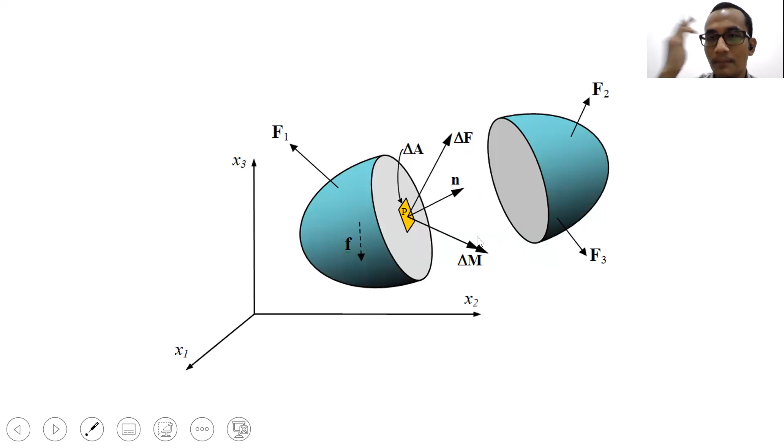So in bahasa we call it gaya dalam, those internal force, or moment dalam, those internal moment. So when we talk about internal effect, we have two types, which is the first one is internal force and the second is internal moment.

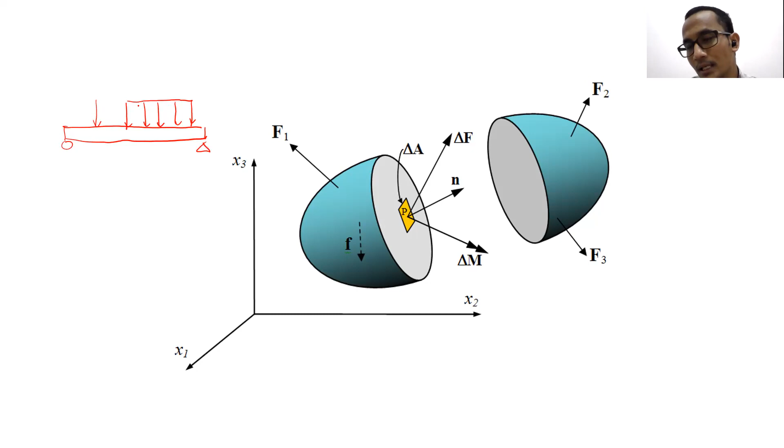So for example, if we have a structure like this, a simply supported structure like this, up until yesterday what we discussed was just what is happening to the structure if we have an external force like this, or yesterday we learned about the distributed force as well. So we learned that if we have an external force and distributed external force, what is the response of the structure? The response here that we are talking about was just the external load response.

And plus one more thing, which is the gravitational force. The response that we are talking about is the response which is happening at the supports. So if we draw a free body diagram, this is what we will have. And here there is an external reaction, this one as well, something like this. Okay, this is what we learned up until today.

So when we have an external force, or external distributed force, or gravitational force, what will be happening and what is the response at the supports, something like that. So the things that we learned up until today was just this one, external effect only.

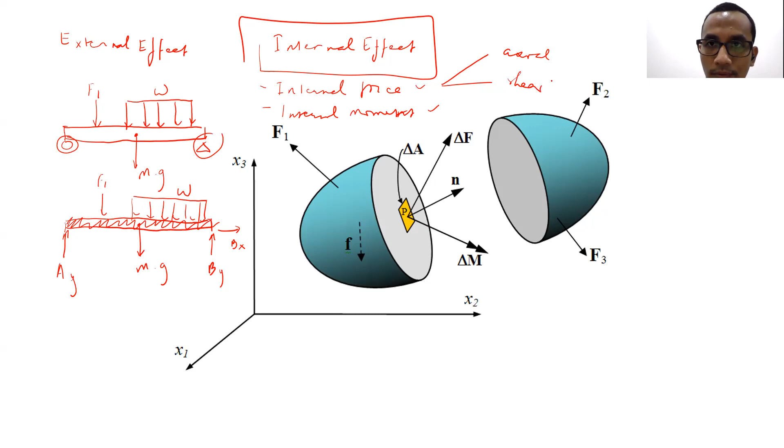And normally the internal force, we can divide it into two as well. This is the axial force, internal axial force, and the second one will be the shear force. So that's the thing that we will study starting from today.

Up until this point, any of you want to ask a question? No one here want to ask a question? Not yet.

I'm sorry, sir, that's the internal force, shear, and what's that about? I cannot read it. We will have a shear force and axial force. Axial. Yeah, axial. Oh, okay. I'm so sorry that my writing is so bad, so it's hard for you to read. Sir, mine is worse.

Okay, so that's the thing that we will study starting from today. And what is actually internal effect? What is actually the internal force and the internal moment? So basically, when we learn about structure up until today, what we studied was just finding the response which is happening at the support, or the response happening at the other member, or the response happening at the particular member due to the other member. That's the thing we studied up until today. But when we talk about internal effect, we will talk about what is really happening.

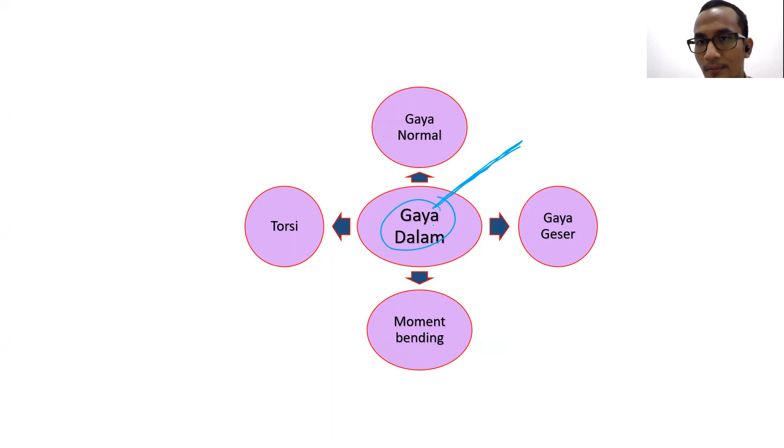So the internal effect, we can divide into several types, based on the direction and whether it is a force or moment.

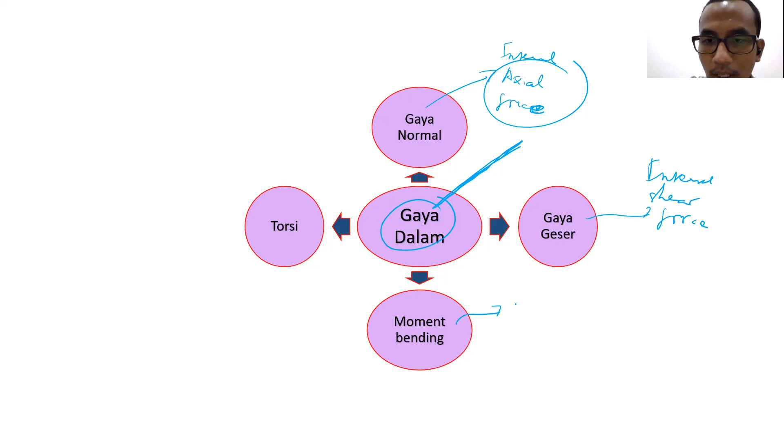So the first one is we normally call this axial force. In the things that you will study up until next, we normally call this axial force. Then this one is shear force. Then internal axial force, internal shear force, then internal bending moment, and the last one is internal torsion. So those four are things that may come up when we talk about internal effect.

So when we talk about internal axial force, this is what we normally discuss. When the direction of the load is like that, it's in the direction of the member, like that.

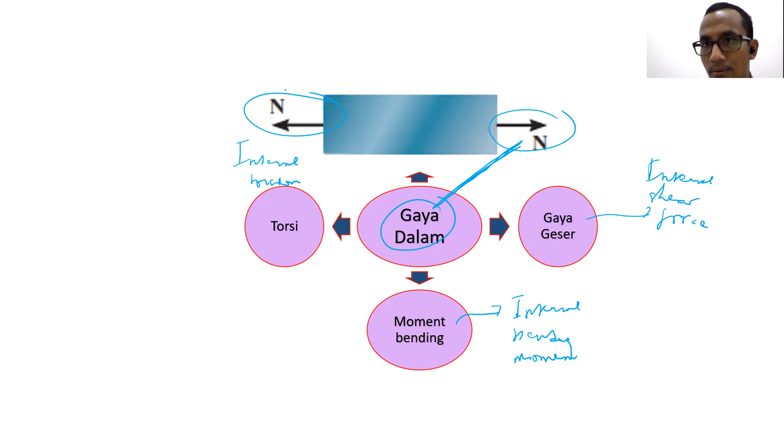When we talk about the shear force, it's perpendicular to the direction of the member. So instead of going, if the member is like this, instead of going outside or inside, it's going perpendicular to it. This is what we call shear force. This one is going in the same direction as the member, we call it axial force.

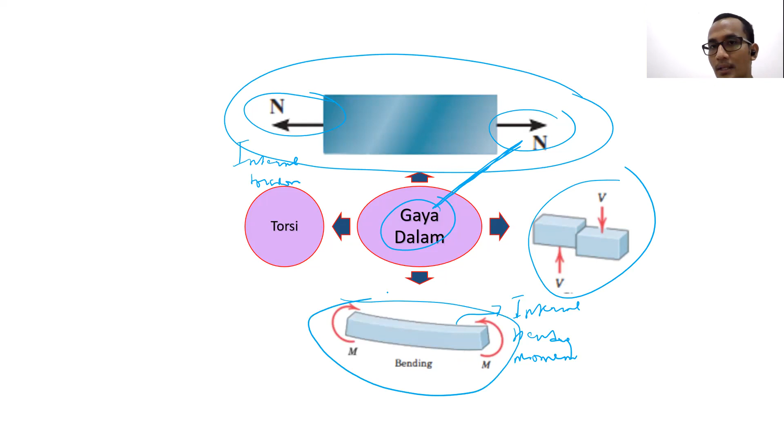Then bending moment is something like this, internal bending moment, right, the one that we talked about. And the last one is torsion, like this. The difference between torsion and bending moment: the moment bending will create a moment like this, but torsion will twist the thing that is applied on it, something like that.

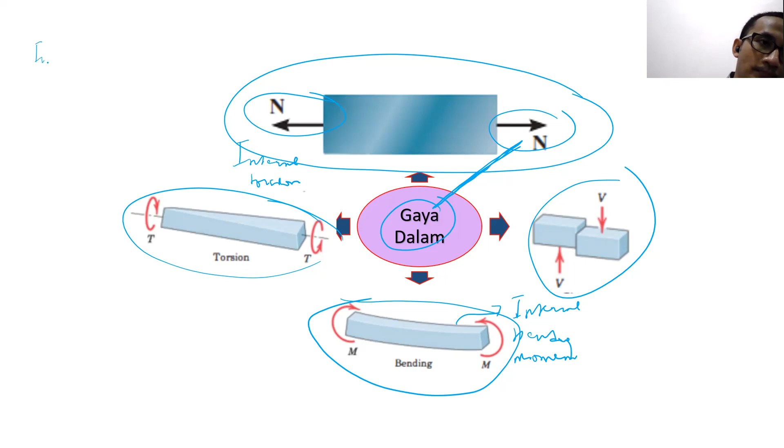So those four we will talk about quite a lot in the internal effect, especially these two, although it's not necessarily that we will omit these two as well. So basically, when we talk about internal effect, there will be four: internal shear force, internal bending moment, internal axial force, and internal torsion.

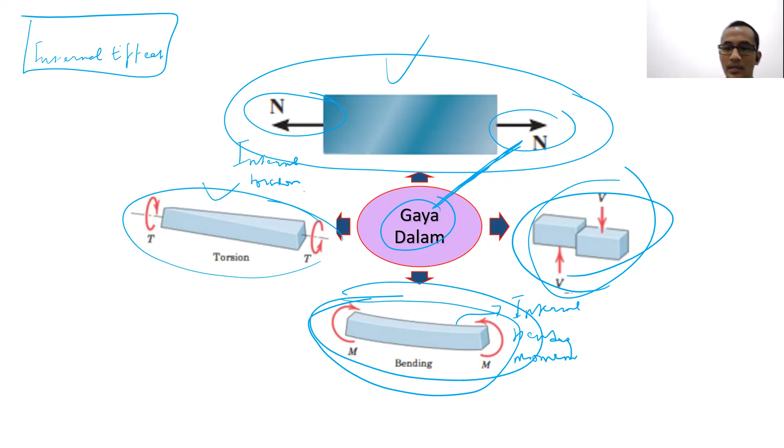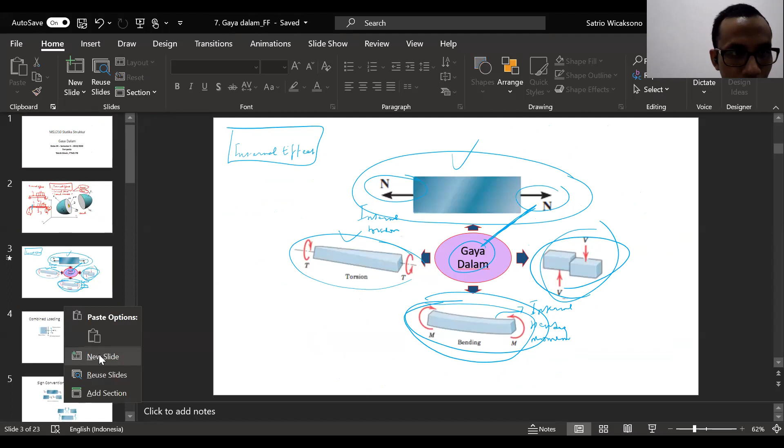Okay, so I think before we go here, I will add another thing. Maybe some of you are still quite confused about what is the meaning behind internal force or internal moment.

So I will give you one simple example on this particular problem. Please imagine you have a structure like this, simply supported. Here we have a roller, and here we have a pin. The structure is under a very simple load happening exactly in the middle.

For example, here we have 10 kilonewton, and the length here is 10 meters.

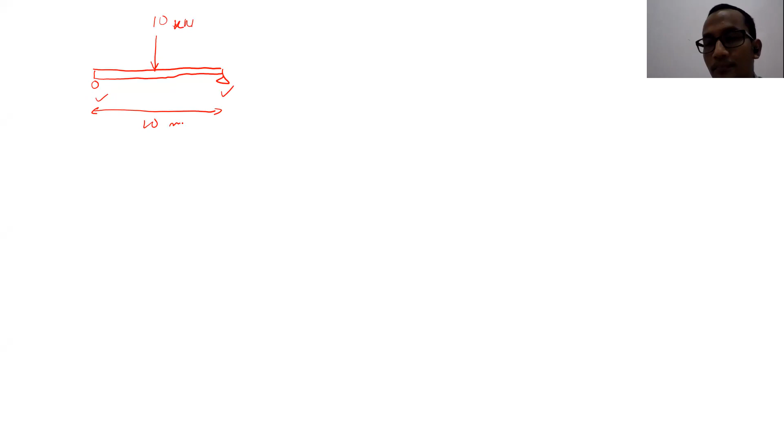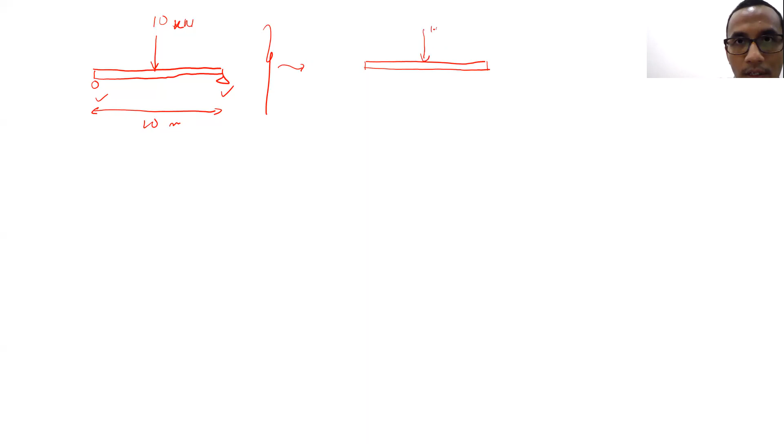If I ask you to find out the external effect, this is the thing we normally study up until now. So we first draw the free body diagram. Exactly in the middle here, we have 10 kilonewton. And here we have AY, here we have BY and BX. This is what we call finding the external effect.

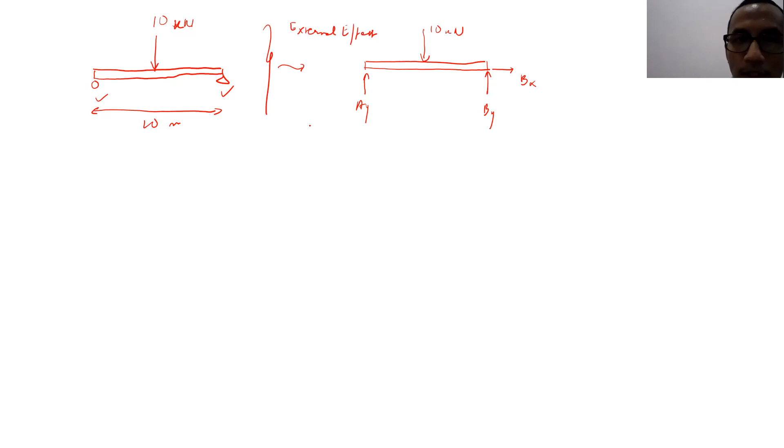Okay, then using sigma Fx equal to 0, we will find out that Bx is equal to 0. Using sigma moment at A equal to 0, then we found out that By multiplied by 10 minus 10 kilonewton multiplied by 5 equal to 0. That's why we will find out that By is equal to 5 kilonewton.

Using sigma Fy equal to 0, then we will find out that Ay plus By is equal to 10 kilonewton. Because By is 5 kilonewton, then Ay is equal to 5 kilonewton. So this is the external force. Sorry, this is the external effect that we normally try to find out. External effect.

Internal effect is completely different. But most of the time, in order to find the internal effect, we have to find out all the external effects first. Okay, so we have to find out all the external effects first. Then after that, we can go for the internal effects. So the internal effect, this is one of the examples.

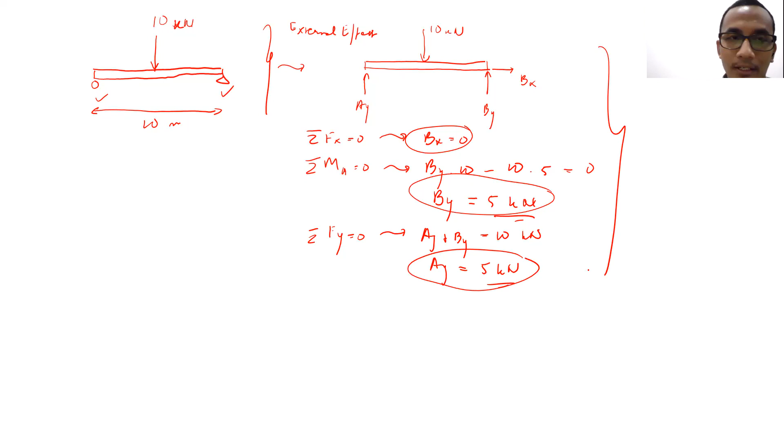I want to find out what is really happening at 2.5 meters from the left edge. I want to find out what is really happening inside of the structure, okay, at 2.5 meters from the left edge, like this. So at this particular point, internal effect at this particular point. I want to find out what is really happening there.

Okay, so basically what we're supposed to do is to find out at that particular cut what is really happening there. Okay, what is the internal force which is really happening there, and what is the internal moment which is really happening there. How can we do that?

The easiest way is to cut exactly at the point where we want to find the internal effects, like this. So this is the easiest way, to cut it here. We make a cut there. Okay, we make a cut. So after we make a cut there, what are we supposed to do? So basically, after we make the cut, we can divide the structure based on whether it is part of the left side of the cut or the right side of the cut.

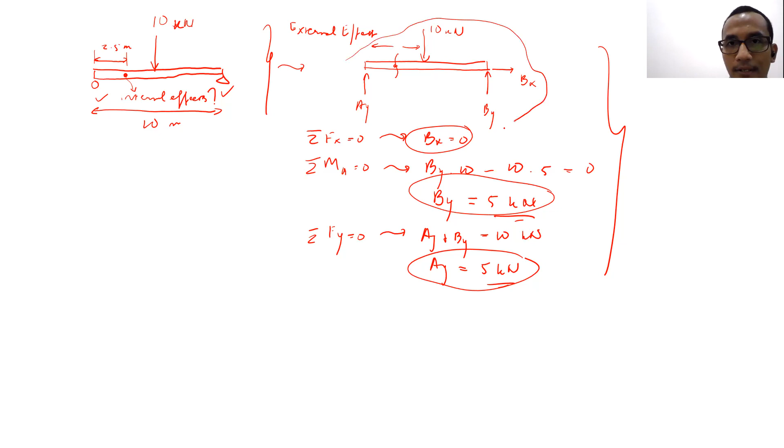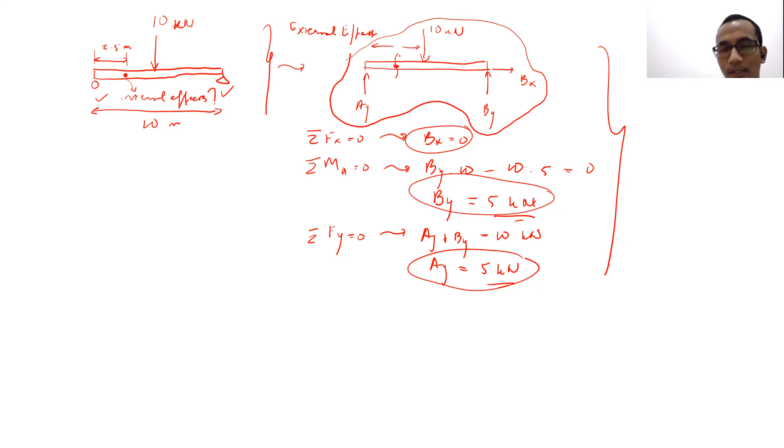Okay, you can imagine if we have things like this, then we cut exactly at this particular point. Okay, we cut exactly there. We cut the structure there using this particular line. Okay, in order to make it easier, I will use a different color. The blue line there represents the cutting that we do. After we do the cut, then we can analyze the left side of the cut and the right side of the cut. Okay, if we take a look at the left side of the cut,

I will ask one of you guys. Marsha. Hello, Marsha. Yes, sir. Okay, Marsha.

Now, I want to take a look at the left side of the cut, Marsha. Okay. If I want to see the left side of the cut, then if I draw the free body diagram of the left side of the cut, it's most likely like this, right? So this one actually represents the part where the cutting happened. Yes, sir. Okay. So now, what is the external effect which we're supposed to include there, the left side of the cut, based on this particular free body diagram? What do you think?

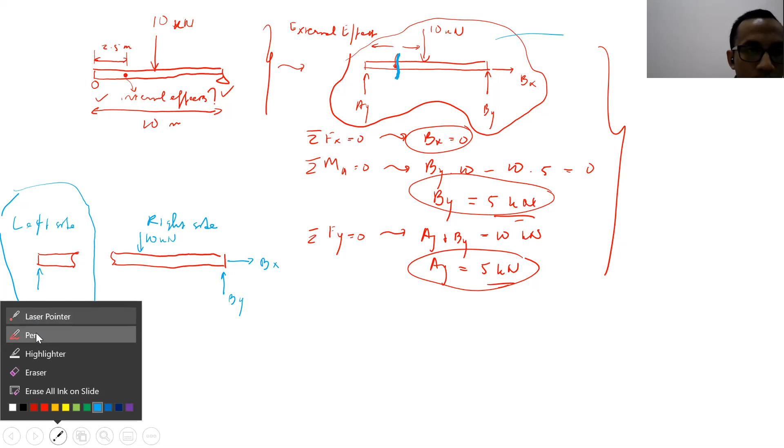Okay, but when we cut it like this, if we want to take a look at the equilibrium of the left side of the cut, the equilibrium, I'm telling all of you guys, is supposed to still be there. The left cut is supposed to still follow the equilibrium. The same thing happens for the right side of the cut. It's supposed to still follow the equilibrium.

Okay, it's supposed to still follow the equilibrium. That's why, okay, I will remove this first because I will do it later. That's why, like it or not, there will be internal effect at the cutting area, around the cutting area. There will be internal effect there.

There will be internal effect, there will be internal force and internal moment, which is happening there in order to ensure that both the left side of the cut and the right side of the cut are still in equilibrium. Do you get it, Marsha? Yes, sir. Okay. Now, Marsha, still for you.

If I want to make sure that equilibrium is still happening on the left side of the cut, what internal force am I supposed to add at the cut area here? What do you think, Marsha? In order for the equilibrium to happen at the left side of the cut.

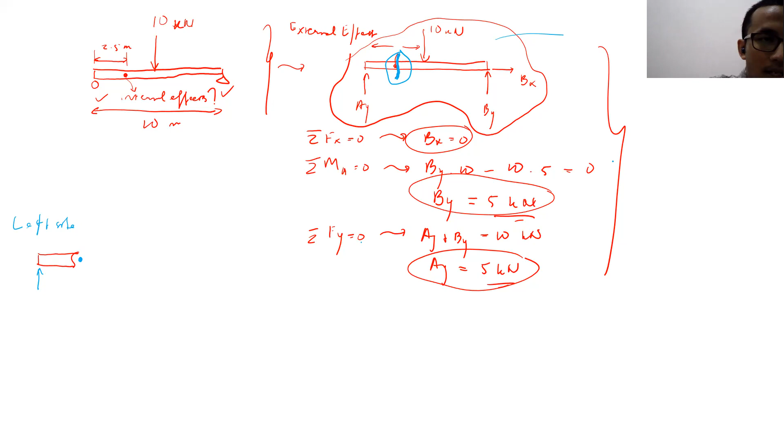No, I mean, in order for the equilibrium still to happen there, the left side of the cut is supposed to follow these equations, right? Sigma Fx equal to 0, sigma Fy equal to 0, and sigma moment equal to 0, right? Yes, sir. That's what we talk about with equilibrium, left side of the cut. So we have to ensure that these equations are still true for this particular free body diagram.

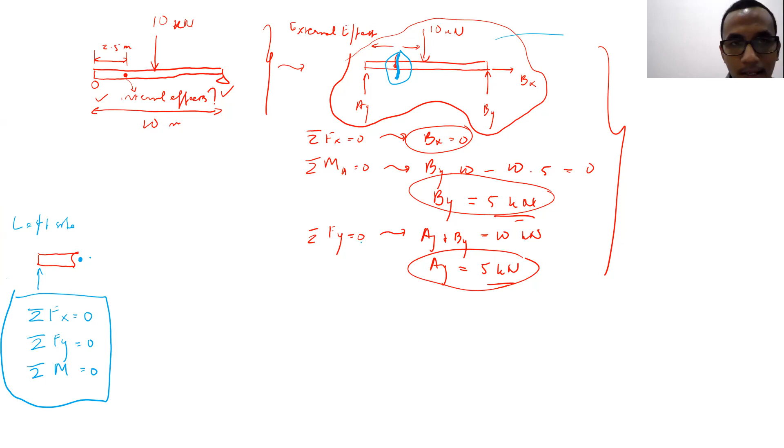In order to do so, we have to ensure that we put the correct internal effect there. Do you get what I mean, Marsha? Yes, sir. So the internal effect is supposed to be there in order to ensure that the equilibrium holds true, Marsha. So what do you think? What internal effect is supposed to be there at the cut part?

Hello, Marsha. Sir, just to make sure, so the internal effect in the cut section is basically the one to replace the forces being cut off to maintain the equilibrium? Yes, correct. So it's basically kind of like a replacement. Not necessarily replacement, but what you said is half correct.

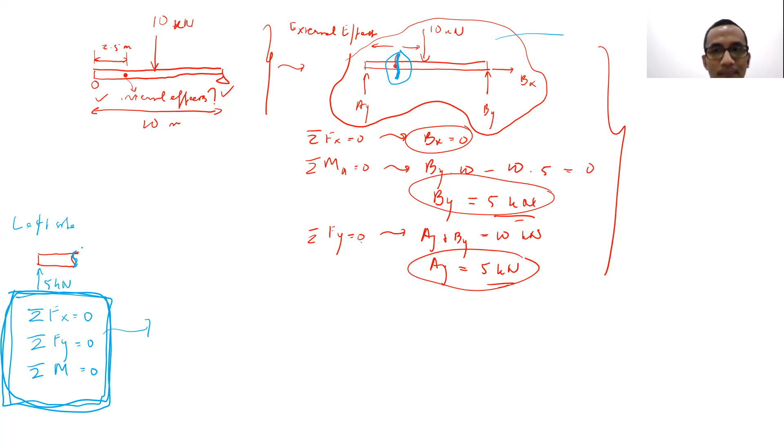So when we talk about the left side of the cut, the 10 kilonewton will not be there. By and Bx will not be there because they are not part of the cut side, right? But like it or not, these three equilibrium equations still have to hold true because the equilibrium is still there. That's why, at the cut area, there must be an internal effect to make sure these three equations still hold.

Now the question is, what kind of internal effect is supposed to be there to ensure the equilibrium still holds true? Oh, I see. You get it, right? So for example, the easiest one, sigma Fy equal to 0. It is still maintained in this free body diagram. So, like it or not, we have to add a vertical internal force at the cut area here, right? Correct or not?

Correct. And is the direction supposed to be going down or going up? Going down. It's supposed to be going down. And the value is supposed to be what, in order to make sure that sigma Fy is equal to 0? Equivalent to this one, right? 5 kilonewtons. Yeah, so it's supposed to be 5 kilonewton. By adding this, I ensure that sigma Fy equal to 0 still holds true, right?

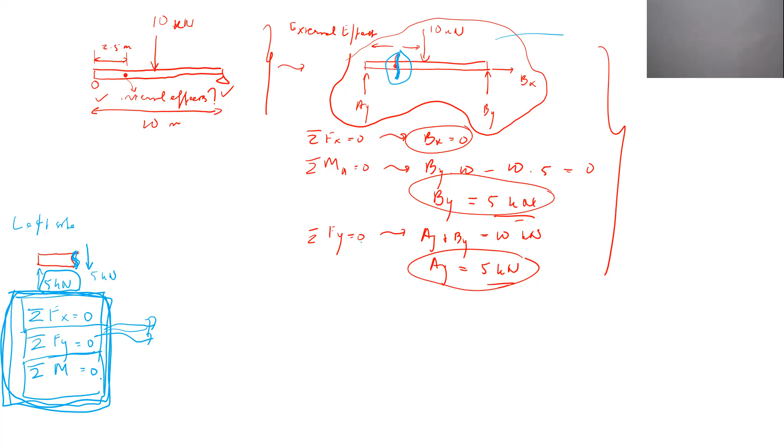What do you think, Azad? But sir, do we have to refer to a point for the sigma moment? Yeah, it's up to you. You can refer to any point that you want there in the free body diagram.

But it already holds, sir, because the forces are already symmetric. Yeah, the forces are not symmetric. Okay, it's anti-symmetric because the left side is going up 5 kilonewton, the right side is going down 5 kilonewton. And if I try to check the sigma moment, for example, on the left side, there will be 5 kilonewton multiplied by 2.5, right? So there will be moment there. The sigma moment equals to 0 is not automatically fulfilled.

Okay, so like it or not, in order to ensure that sigma moment equal to 0 still holds true or is fulfilled, the current moment, which is happening due to the 5 kilonewton going up and down, is actually clockwise. So we have to add counterclockwise moment. And the value is supposed to be 5 kilonewton multiplied by 2.5 meters. So in this case, it's supposed to be 12.5 kilonewton meter. If I add moment like that at this particular cut, then all of the equilibrium equations are fulfilled.

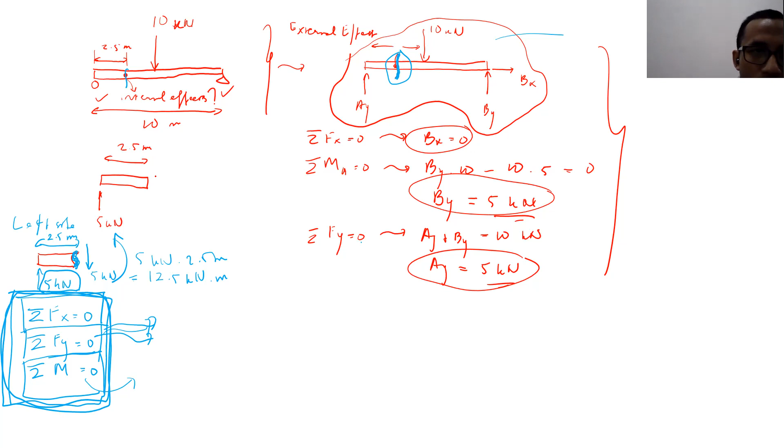That's why now I can say that for this particular cut, if we take a look from the left side of the cut, we have two internal effects there. The first internal effect is shear force going down 5 kilonewton. The second internal effect is moment, counterclockwise moment, 12.5 kilonewton meter. Those two are the internal effects which are happening at the cut.

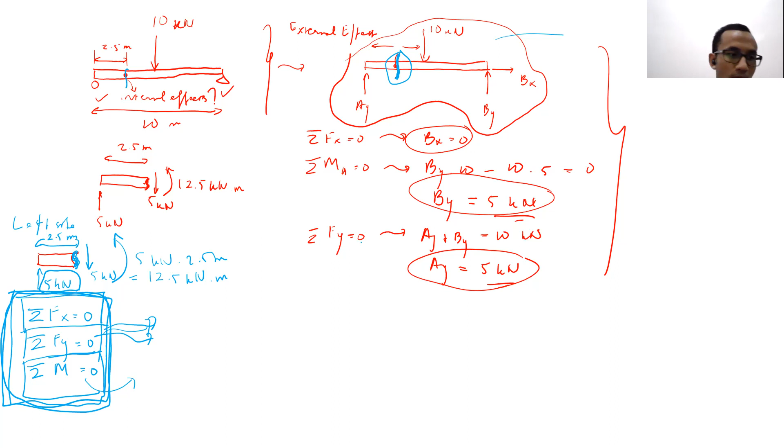Do you guys have any question about this? Any question? Yes, Lalu. Sir, I don't understand why the moment is counterclockwise. The moment is counterclockwise because the 5 kilonewton force going up and 5 kilonewton going down are actually causing a clockwise couple, right? Yes, sir. The value of the clockwise couple is actually 5 multiplied by 2.5, which is 12.5 kilonewton meters clockwise.

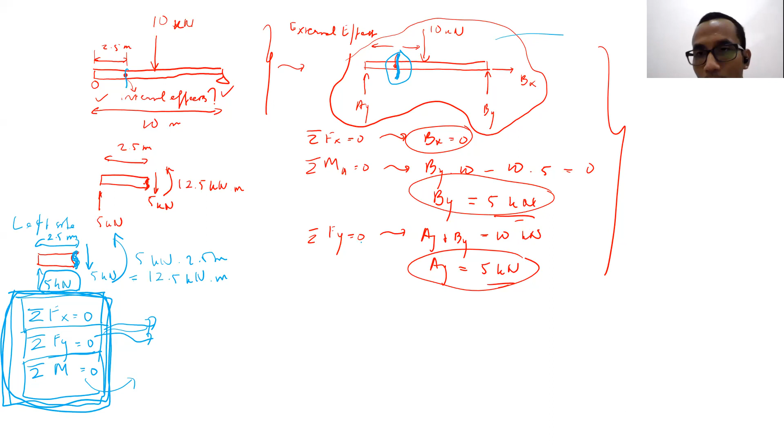Okay. In order to ensure that the structure is under equilibrium on the left side of the cut, I have to give internal moment in the opposite direction. Oh, okay, sir. So just for the equilibrium. Yep, correct. Because the equilibrium is supposed to be fulfilled there. That's why the internal moment there is supposed to be counterclockwise. Okay, sir.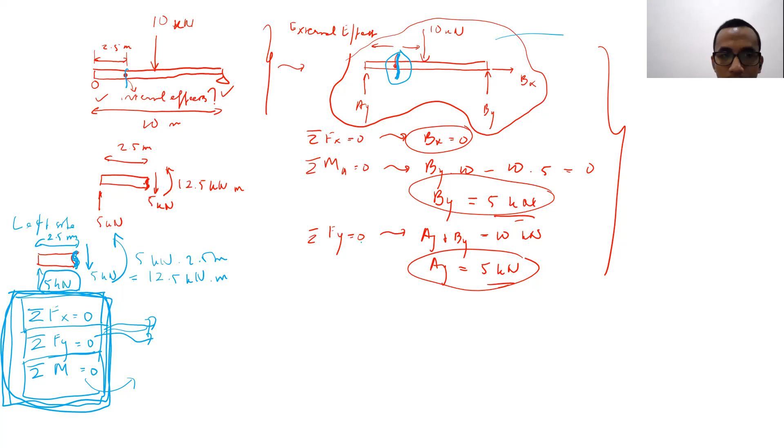Sir, just want to clarify, sir. So to get the internal effect is to draw the force the opposite way, sir? Actually, it's not to draw the force the opposite way, but just to calculate using this equilibrium equation, Marsha. So as long as we ensure that these three equilibrium equations are still fulfilled, then the internal force that we calculated from these three equations is supposed to be correct.

So basically, just now, I found out that the shear force is 5 kilonewton by using sigma Fy equal to 0, right? I found out that there is no axial internal force using sigma Fx equal to 0. Then the last one, I found out that the internal moment is 12.5 kilonewton meters counterclockwise using this particular equation, sigma moment equal to 0.

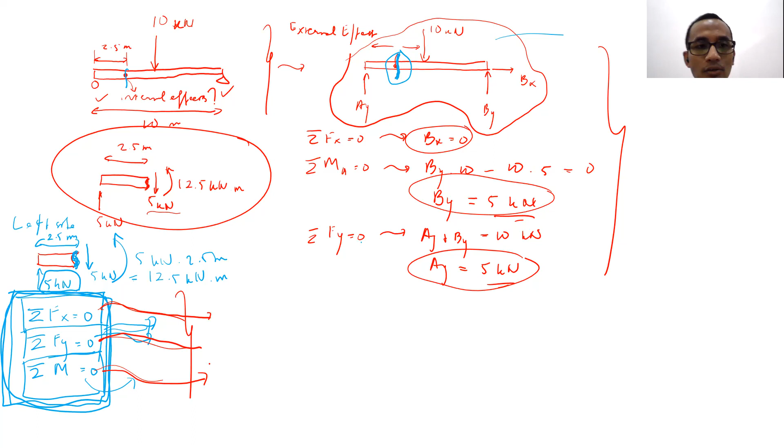So basically, after you do the cutting, to find out the internal effect at that particular cut, the first thing that you're supposed to do is to implement the equilibrium equations to find out the internal effect which is happening at that cut, like that. Do you get it, Marsha? Okay.

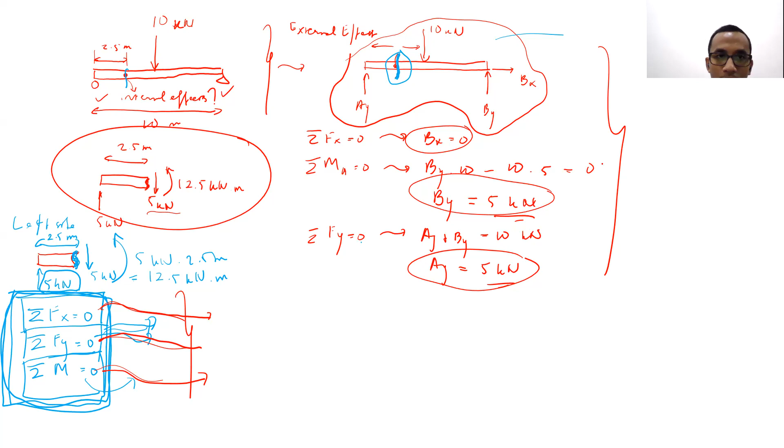Now I will tell you one important thing about this cut. Just now, we took a look from the left side of the cut. Now, let's do the same thing, but using the right side of the cut. If I draw the right side of the cut, this is the free body diagram of the right side of the cut. Like just now, we have 10 kilonewton here. Then here we have By equal to 5 kilonewton. Bx is equal to 0, so I will not draw it there. Okay.

So this is our free body diagram, but this free body diagram is not yet complete because we have not yet completed it with the internal effect. Okay, now this is what I normally do. I will assume it first. I will assume that I have an internal effect of shear force V there, an internal effect in the shape of axial force N there, and an internal effect in the shape of moment like this, M. I assume that we have those three: M, N, and V.

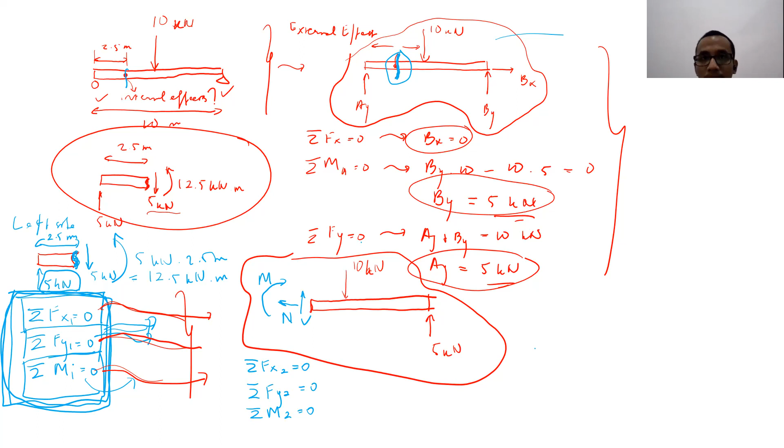I think I'll point out another student here. Raihana. Hello, Raihana. Hello, sir. Can you help me to find out those three internal effects, Raihana?

First, try to find out N, the axial force, using sigma Fx2 equal to 0. For this particular free body diagram, if I want to use sigma Fx2 equal to 0, what do we have there? What are the forces going horizontally there? Only N. N, correct. So here, N only, then N must be equal to 0, right? Yes. So we have the value of the axial force. N is equal to 0 because using sigma Fx2 equal to 0, N is equal to 0.

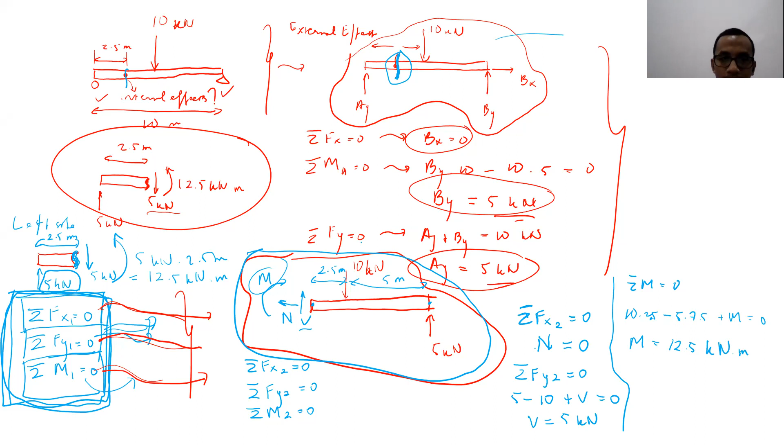Done? Nope. There is a moment there, the M. Is M supposed to be plus or minus? Plus. Plus M equal to 0. So M is equal to? Wait. 12.5 positive. So this one is 25, and 5 multiplied by 7.5. Oh, positive, yeah, correct. 12.5 positive. So it's supposed to be 12.5 kilonewton meter. Okay. So that's all the internal effects, right? Or anything else, Raihana? I don't think so. So this is all that we have there.

So if I redraw it again, the final free body diagram is supposed to be like this. 10 kilonewton, 5 kilonewton, and because of the internal effect, we will have shear force 5 kilonewton going up here, and we have as well moment 12.5 kilonewton meter there. Okay, correct, right, Raihana?

Sir, wait. Is the moment on the right side supposed to be the same moment as on the left side? Like, the direction is different? Like we are picking the positive when we go clockwise. Yeah, that's the thing that I want to discuss right now. So don't worry about it. Okay, so all of you, please take a look at this: the second free body diagram, the right side of the cut, and this one as well.

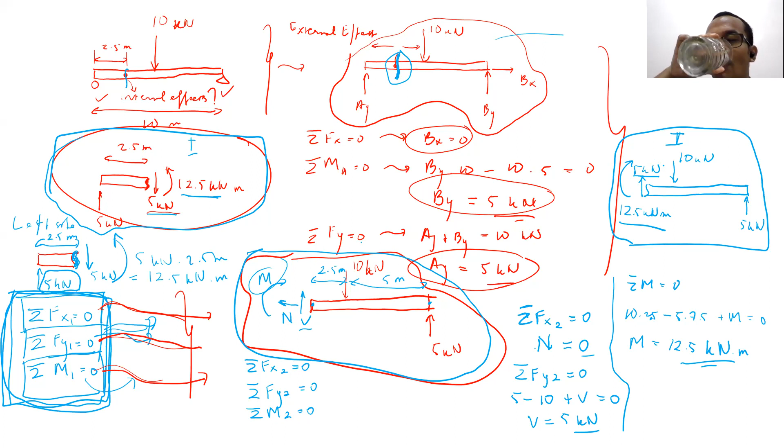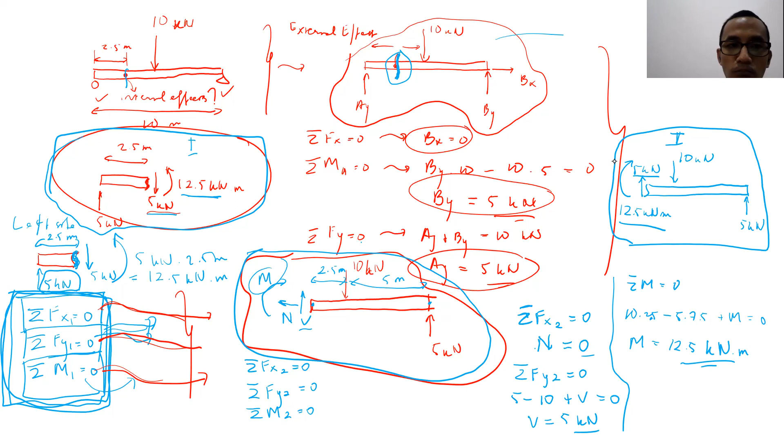Okay. Is there something weird there? Is there something unusual there? So sir, they must be equal and opposite reactions. Who said that just now? Irfan, sir. Okay, Irfan. Thank you, Irfan. How about you, Asep? Same thing, right? Yes. The positive direction of the moment. What do you mean by the positive direction of the moment? On the left side, it's counterclockwise, but on the right side, it's clockwise.

Yeah. Positive, negative, yes, we're supposed to follow the rules, but for internal effects, the rules are slightly different. We have to follow the other sign convention that I will discuss after this. But the first thing that you notice here is, based on the right side of the cut, we have 12.5 kilonewton meters clockwise. Based on the left side of the cut, we have 12.5 kilonewton meters counterclockwise, right? 5 kilonewton going up on the right side of the cut, 5 kilonewton going down on the left side of the cut. Okay.

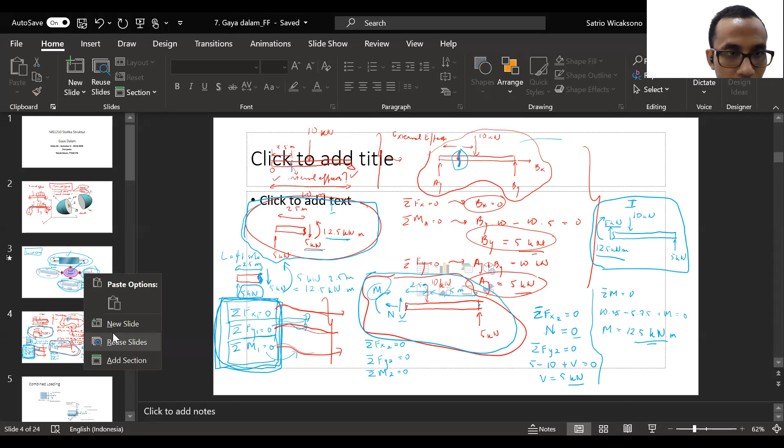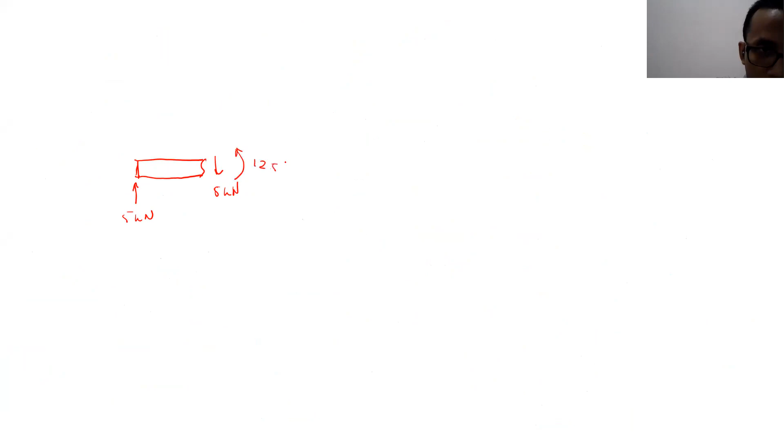There is one reason why the internal effects are in the opposite direction on the left side of the cut and the right side of the cut. So basically, I will need another slide here. Okay, basically, if I have to redraw again, right? 5, 5, 12.5 counterclockwise. So this is the left side of the cut. And this is the right side of the cut. Okay. So basically it's like this. Why are this and this in the opposite direction? There is one reason behind that.

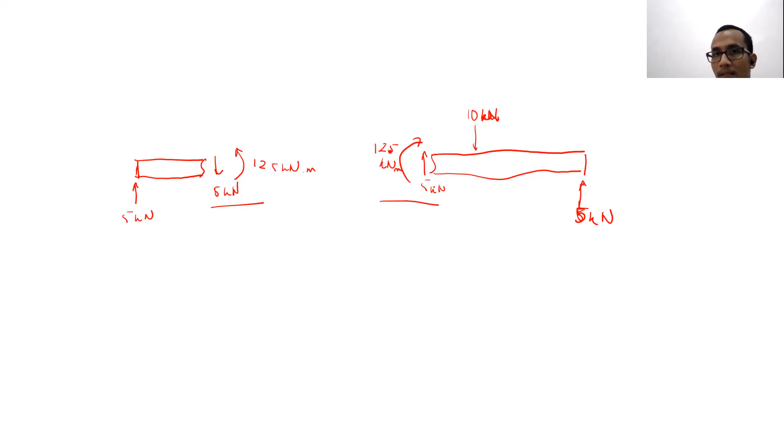When you join this together with this one, join it together again at the cut area, the results that you're supposed to get will be exactly the same, okay, as the previous one without the cut.

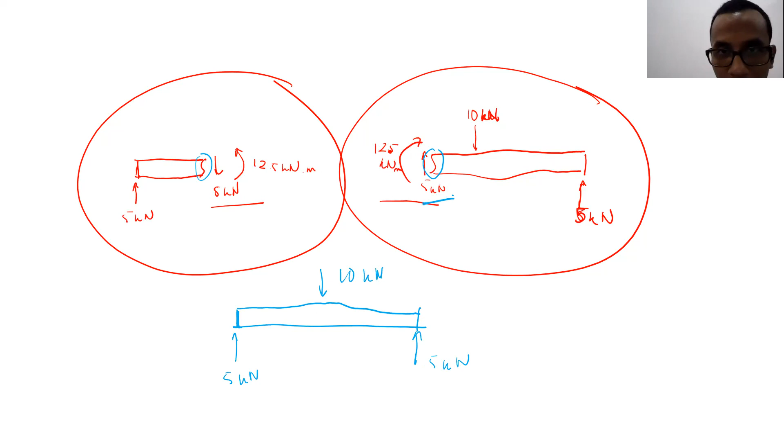Okay, if you join it together, 5 kilonewton here will cancel out with this one, 5 kilonewton. 12.5 kilonewton meters here will cancel out with this one, 12.5 kilonewton meters. So if you join it together, because these cancel out, what you will get will be like this: 5 kilonewton going up, 10 kilonewton going down, 5 kilonewton going up.

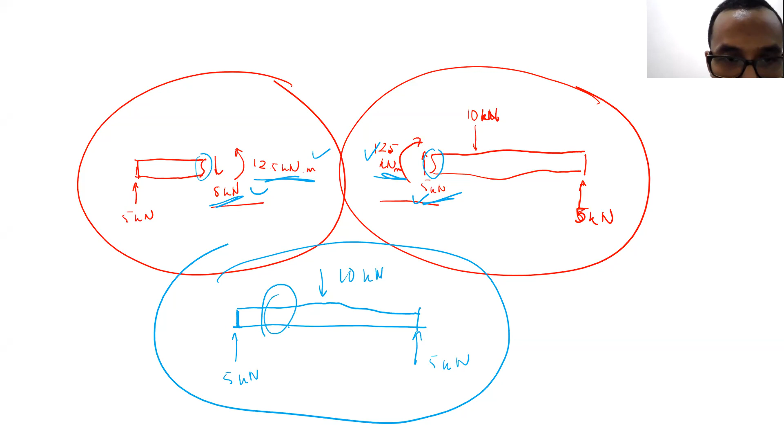So basically, that is why the results must be in the opposite direction, because when you join it together at the cut area, it's supposed to cancel out. So there is no more force or moment happening at the cut area, because we join it together and the moment and the force are supposed to cancel out. Whichever side you calculate, the results will be the same, but in the opposite direction.

Do you guys understand this? Anyone here want to ask a question? So sir, when both sides are being combined into one, does the convention for clockwise or counterclockwise positive become only one? Don't think about the sign convention yet, because later I will talk about the sign convention of the internal force, internal moment, the internal effects.

But the basic thing is, the internal effects will appear when you cut and separate the left side of the cut and the right side of the cut. But when you join the left side and the right side of the cut again into one big free body diagram, as usual, the internal effects will be gone because the internal effect from the left side and the internal effect from the right side will cancel out. That's the thing.

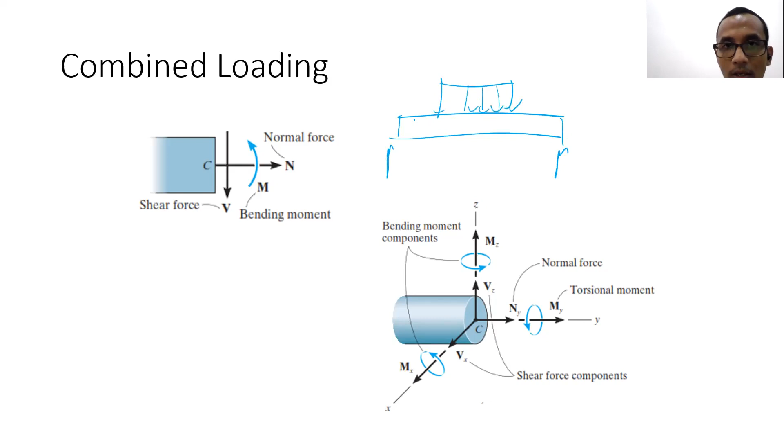So as I told you before, when we talk about the internal effect, normally we have to put all the possible internal effects there. So whenever we cut, for example we have a structure like this under a certain load, like that. Whenever we cut, we're supposed to put all the possible internal effects. So all the possible internal effects, you can see it like this, plus the torsion as well, as what Matthew said.

So we have to put it like this. We have a N, then we have a V, then we have a moment, and we have a torsion like this.

Okay, so this is the combined thing, the worst possible case that may appear there, which means all the things are coming up together: the shear force, axial force, moment, bending moment, and torsion.

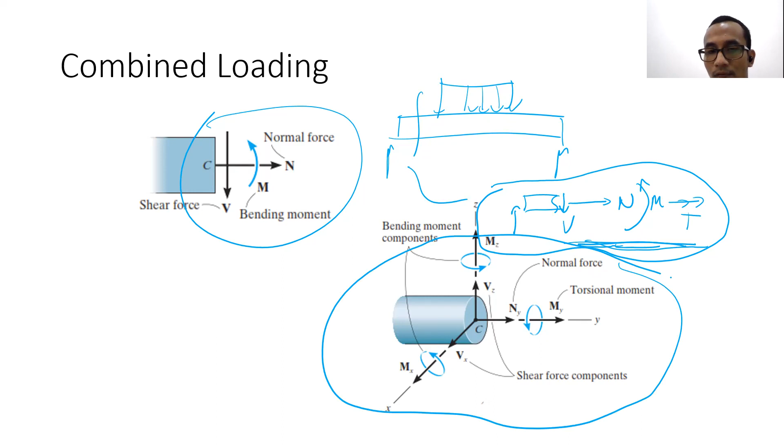Something like that. Okay, in a three-dimensional case, it's even worse. You can see it like this. There are 6 possible combinations there: normal force, torsional moment, bending moment in the Z direction, bending moment in the X direction, shear force in the Z direction, and shear force in the X direction. But we will not talk about the three-dimensional case, so most of the time we will talk about this.

Sorry, this one sometimes it will be there as well. So this is the worst thing that you may come up with. But most of the time, yes, we have it like this. But sometimes we have to handle things like this as well. Okay, then in order to make it easier for you guys, after this I will give several problem examples.

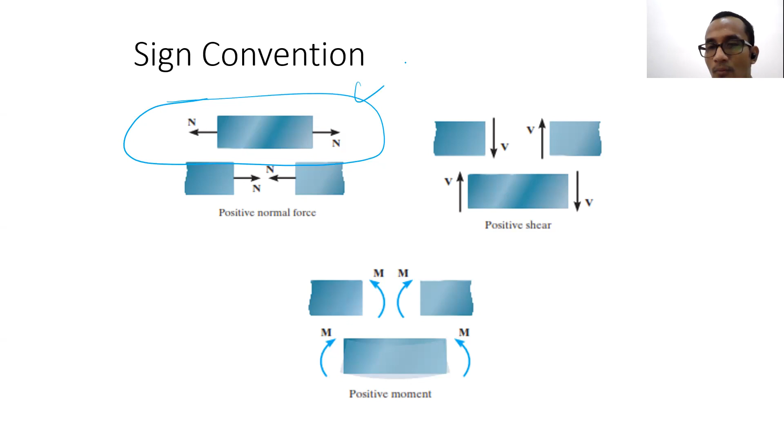But before that, as I told Azar before, we have to discuss a little bit about the sign convention. Whenever we cut, the sign convention on the right side and the left side for the normal force is like this. So tension is positive, compression is negative. So whenever we talk about the normal force or axial force, tension is positive.

Okay, then about moment, for moment which will give a smiley face, a smiley structure, that is the positive moment. So basically, if you see this particular moment, it will give a smiley structure. Why? Because the moment is like this, right, in this direction. That is why it will give a smiley structure.

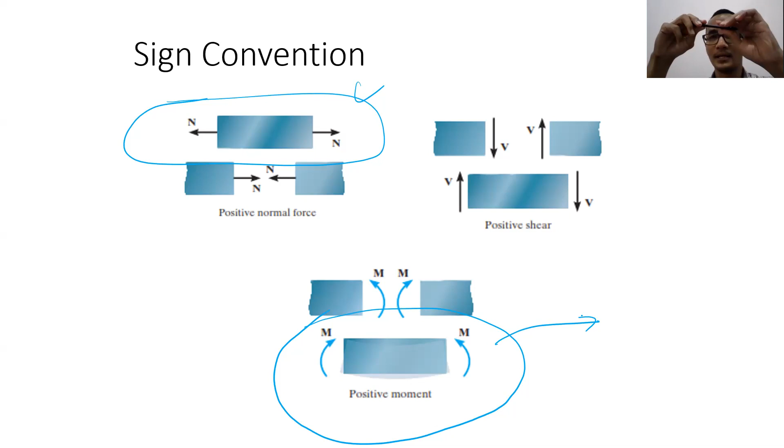So if you imagine that you have a ruler like that - I don't have a ruler in my hand right now - so if I have this structure and I give a moment like this, the structure will deform like this. Sorry, the structure will deform like it will deform like - how to say it - it will deform like this. So it will give a smiley face like that. Okay, it will deform like that. So this is the positive moment direction.

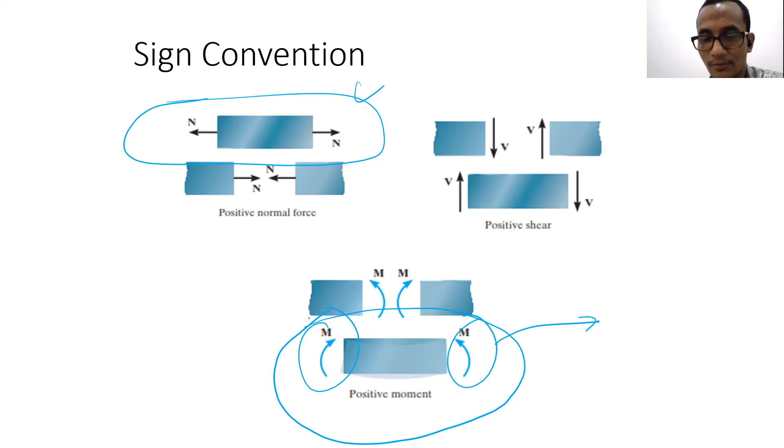On the left side of the cut, it's clockwise. On the right side of the cut, it's counterclockwise. That's the positive moment direction. The positive shear is like this. On the left side of the cut, it's going up, positive. On the right side of the cut, it's going down, positive.

So if I try to conclude, if we have a cut like this, the positive direction of the normal force or axial force is like this, going outside. The positive direction for the shear force is like this, going down. And the positive direction for the moment is like this, counterclockwise. It's for this particular cut.

But for the opposite cut, if the cut is happening here, the positive direction for the normal force is going to the left, going outside. The positive direction for the shear force is going up.

Okay, the positive direction for the moment is like this.

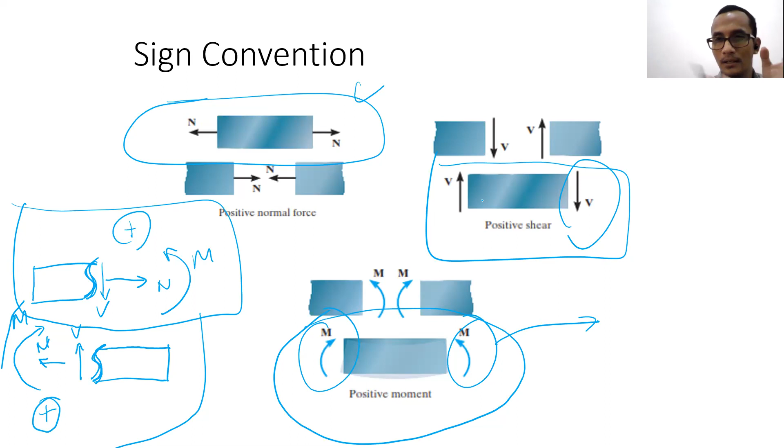Mainly because when we take a look at the left side of the cut, the results there versus the right side of the cut results, will be in the opposite direction. That's why we use this particular sign convention in order to not confuse ourselves. Okay. Yes, sir, I understand. Thank you, sir. No problem.

Okay, I think we will continue with the discussion using one or two problem examples. Then after that, for your homework, I will give you several problems on the external force, sorry, on the distributed force and this particular internal effect at one particular point. Later I will give you guys several homework on this. But first, we have several problems to solve here.

Okay, this is the first problem. This is a combination between distributed external force and the internal effect. The one in question here is the internal effect at point C. So we will have to find the internal effect at point C.

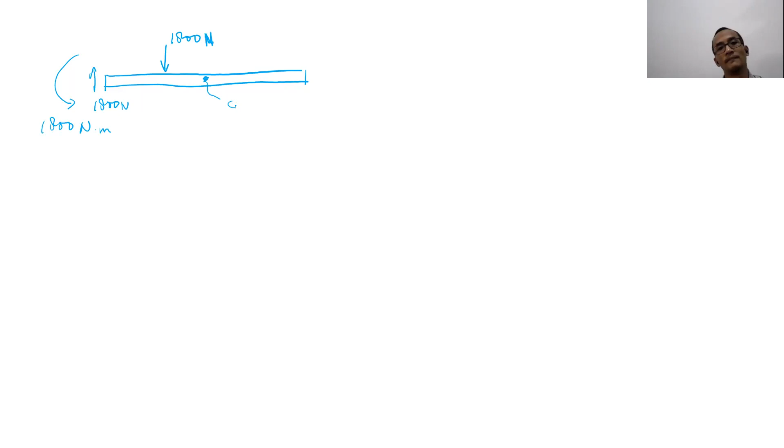Yes, this is C. Okay, so the next thing we're supposed to do is find out the internal force at C, the internal effects at C. Yes, how do we do so?

Do we draw the broken pieces of the left and right side? Okay, so we do the imaginary cut, right? Yes, so we do the imaginary cut, and then we draw the free body diagram, right? Yes.

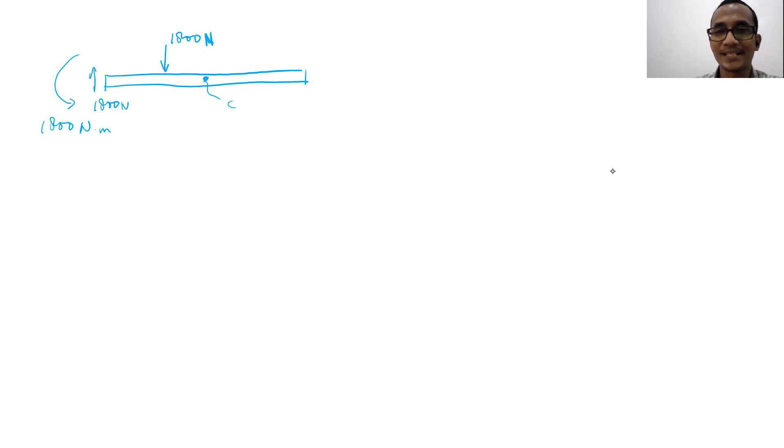So basically, actually this is slightly wrong, this particular free body diagram. Remember yesterday when I told you, Adam, representing the distributed external force as a concentrated force will only work to find out the external effect, right? Now remember, I told you so, right? Yes, yeah, also you don't remember, I think.

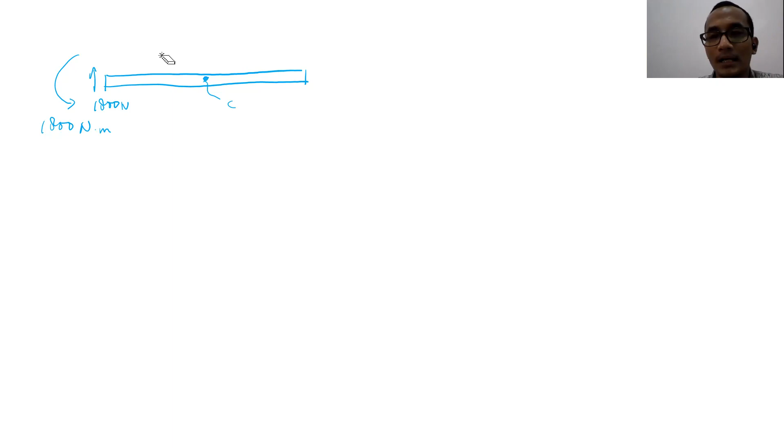So in order to find out the internal effect, we cannot draw it as the concentrated force. So we have to draw it as the distributed force. I see. So you still have to draw it like this, 1,200 Newton per meter.

Something like that. So do you separate them first and then find the resultant forces? Correct. I see. Okay, so now we want to do this one, right? This particular cut, right?

Yes. Okay, you want to do the left side of the cut or the right side of the cut? Left side. You sure about the left side? There are a lot of forces there. The right side of the cut is only the triangle internal force, the triangle distributed force. So that's the thing, whenever you want to solve something, try to solve the easiest one.

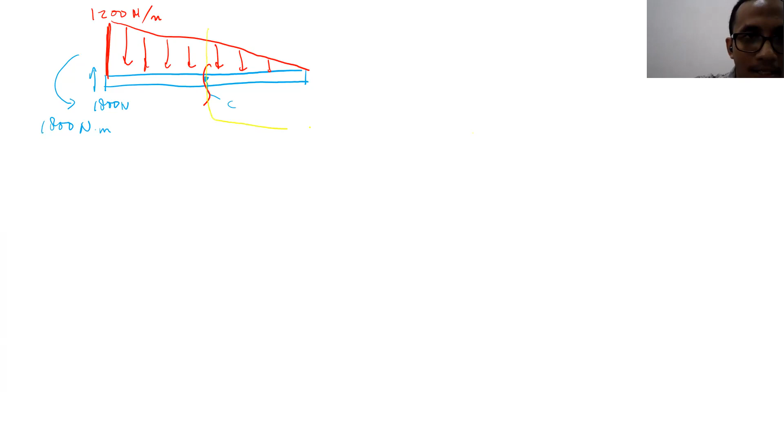Okay, so for this one, the right side of the cut is supposed to be easier than the left side of the cut, right? That's why it's better for us to use the right side of the cut. Now I will try to draw the right side of the cut.

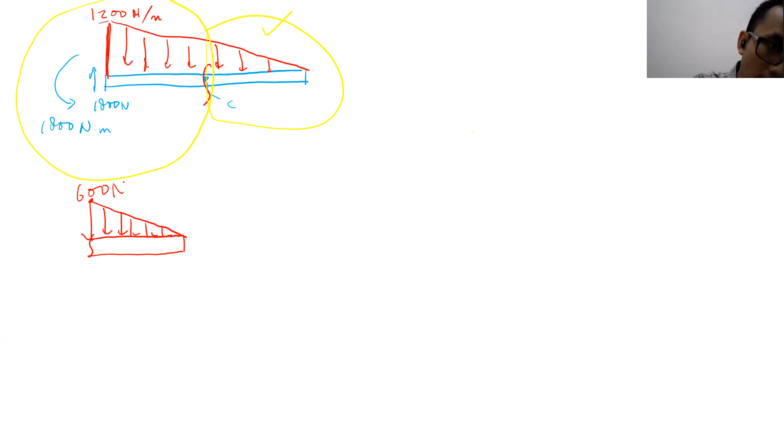Okay, so this is the right side of the cut, right? Now, what is the value of the W at this particular edge? It's not 1,200 Newton per meter anymore, right? Now it's exactly in the middle. Yes. What is the value there? Is it 600? Correct, 600 Newton per meter. Okay, now please help me as well to draw the positive internal effects based on our previous sign convention at point C here.

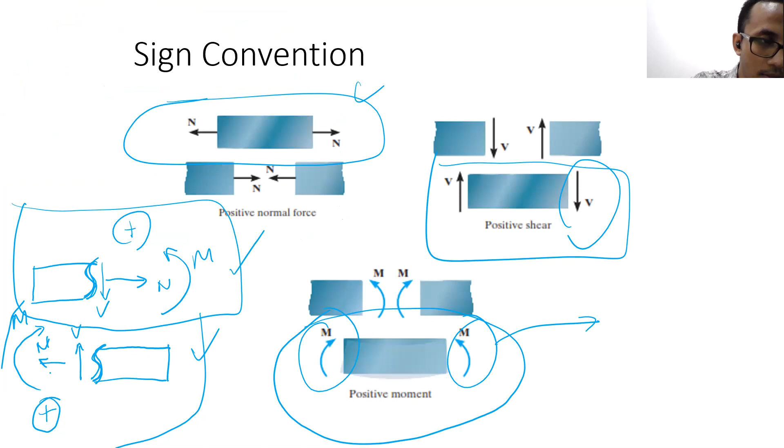Let's see. So draw all of those. What do you have? Positive direction of the normal. Yep, normal is going left or right? Positive. Always tension. Remember, tension is always positive. So right? No, left, or this one. Oh, right? So it was the one circled. I thought it was the one being circled. No, this one. Oh, okay. This one, right? Okay, yeah. So to the left.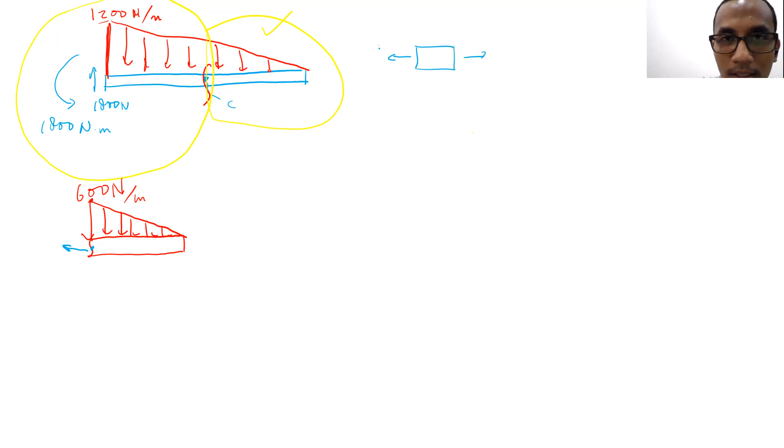And how about V? The shear force. Is it up? In order to make it easier for you, right? The N is always tension. The V is always giving a clockwise moment, and the moment is always giving a smiley structure. Okay. So V is going up or down? Is it up? Up. This one.

How about moment? Counterclockwise or clockwise? Counter. Take a look at this. You just need to copy that, right? Oh, clockwise. Clockwise. I see. So always remember that when we talk about this side of the cut, this is the positive direction. When we talk about this side of the cut, this is the positive direction. Okay. So now we have the N, V, M positive direction.

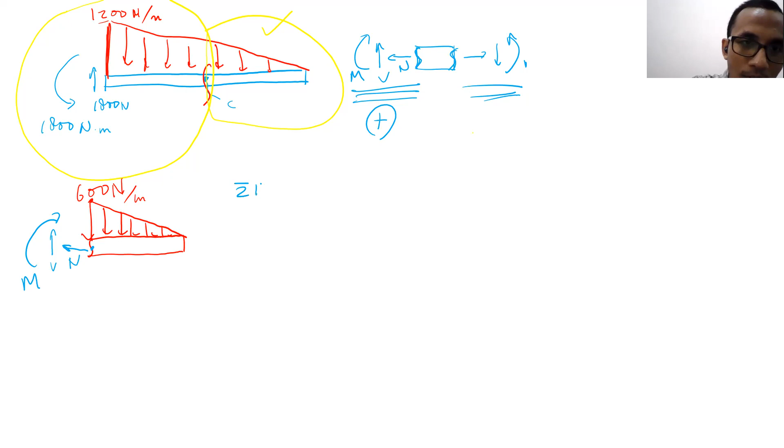Now, the next thing is to find out the value of N, V, and M, right? The first thing that I want to calculate is sigma Fx equal to 0. What will you have there? N equals 0. Then the next one, sigma Fy equal to 0. What will you have there? V minus 600 times 1.5 meter. This is the line. 600 times 1.5 divided by 2, equal to 0, right? Yes.

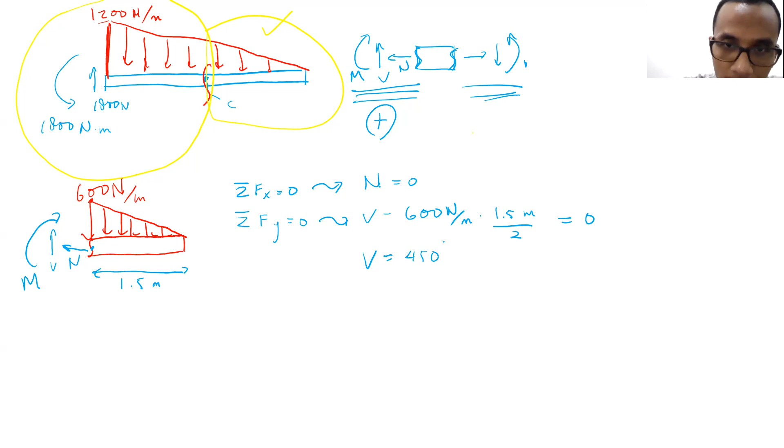Okay, so V is equal to 900? No, 900 is just multiplying by 1.5. 900 divided by 2, 450. 450 Newton. That's it. If I want to represent the distributed force with a concentrated force, it's supposed to be around here, 0.5 meters from the left, right? And the value there is supposed to be 450 Newton. That's why the V here is 450 going up, because the resultant of the distributed force is 450 going down. So it's correct.

Okay. Now, using sigma moment equal to 0 on the left edge, what will you have there? M minus 450 Newtons times 0.5 equals 0. So M is equal to 225 Newton meter. So this is the result that you're supposed to get. Okay. Do you understand now, Adam?

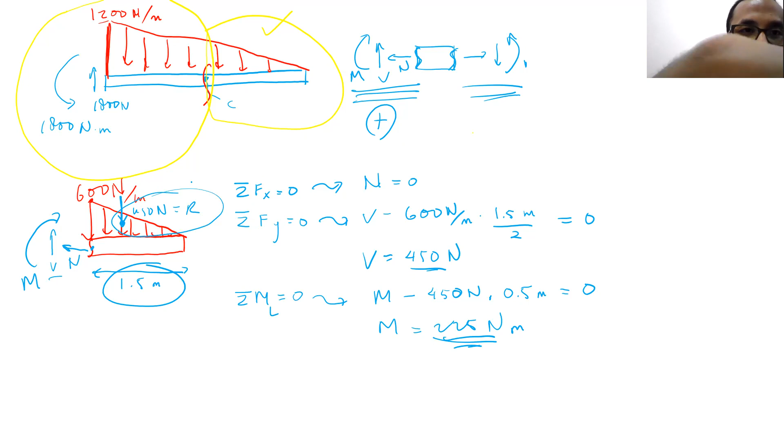Yes, I understand. Okay. So after you cut, this is for all of you guys, if the cut is already fixed at a certain location, for example at 1.5 meters, then you can represent the distributed force with a resultant force like this. But if it's like the main free body diagram, this is sometimes the mistake that students make. This free body diagram we drew just now to solve for MA, AX, and AY, right?

Then sometimes students make a mistake like this. Now AX, AY, MA are already found. Then I want to find the internal effects happening at point C. Then students draw it like this. Seems like this one is easier because there is nothing there. So some of the students draw it like this. Okay, so this is my free body diagram. V going up and N going to the left.

N going to the left, moment is like this. But nothing is here. Okay, this one is the wrong free body diagram. Because remember, whenever you talk about the internal effect, you cannot directly represent the distributed force with one concentrated force, because it will not be valid all the time. This is one of the cases where it's not valid.

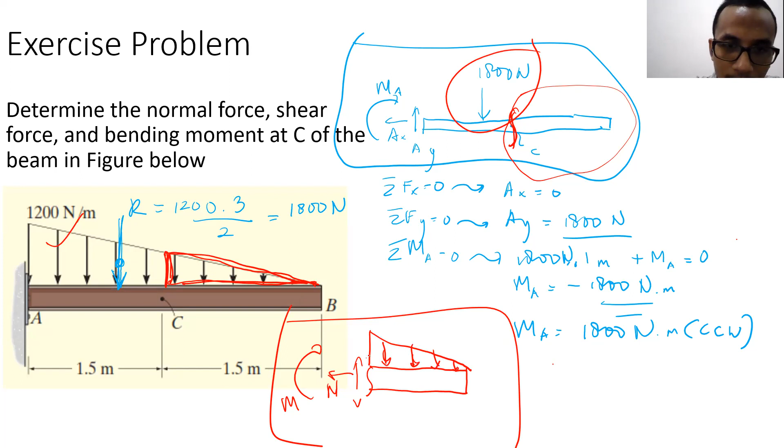Because in reality, there is a load there. From this to this, there is a distributed load, distributed force there. So the load is supposed to be there. It's not necessarily that by representing it here, it will be represented in this particular cut. No. So you have to draw the distributed force there. Like this. This is the correct one. Okay, do you guys understand about this?

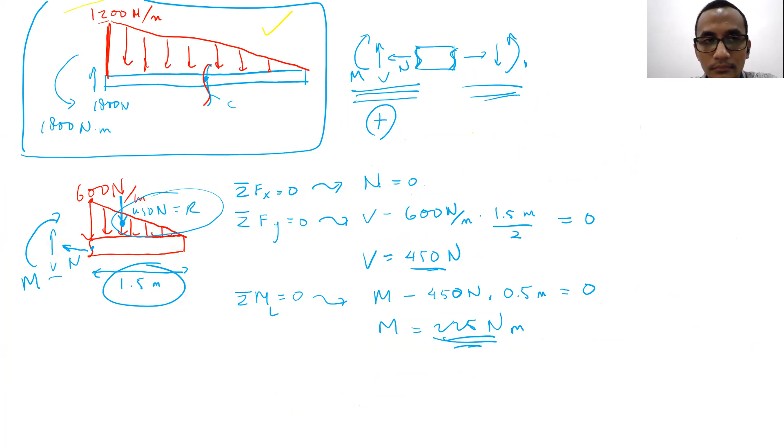Pak? Yes, Matthew. For the left cut, if we look at it from the left cut, the area of the triangle will not be a triangle. Yes, it will not be a triangle. Also, a clockwise moment will not be a positive value for the bending moment. For the cut, yes, because later when you draw it from the left, this is what you will have. So the distributed force will be like this. So later you will have to combine triangle and rectangle.

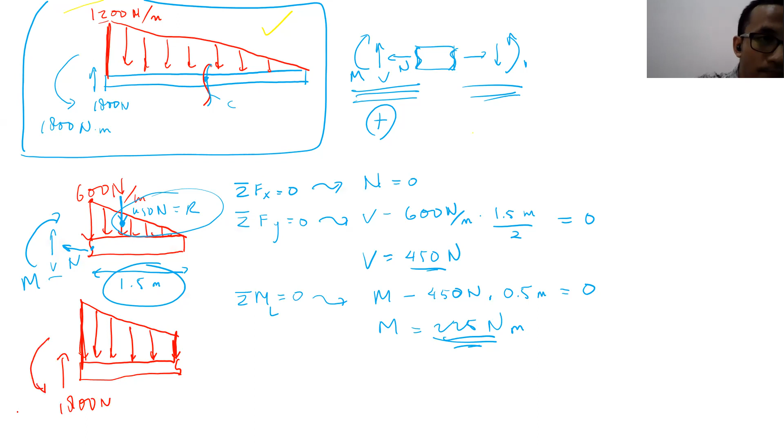And we have this one, 1,800 Newton meter. And then at point C, the positive N will be going to the right, tension, V will be going down, and M will be counterclockwise. Here there is 1,200 Newton per meter. Here is 600 Newton per meter. The value of w is varying from 1,200 to 600 Newton per meter. And if you do the calculation here, the results must be the same as this one. Okay, Matthew?

Okay, Pak. So the counterclockwise moment here is considered as positive bending moment? This one, yes. It's considered as positive there. So if you find that the result is positive, for example this one, using the positive bending moment on the right side of the cut, we found that M is positive, 225 Newton meters. And if you use the left side of the cut, assuming the positive moment is counterclockwise, the result will still be positive 225 Newton meters. Do you get it, Matthew? Yes, sir.

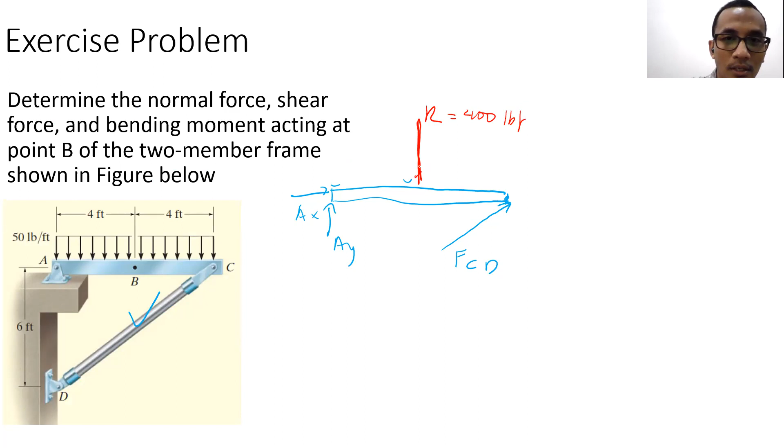The centroid is in the middle. So you can replace the distributed force with one resultant force. The resultant force is 50 pound-force per foot multiplied by 8, so 400 lbf. That's the representative concentrated force. So we can delete the distributed force and replace it with the concentrated external force, exactly in the middle, 400 lbf.

Okay, then using sigma Fy equal to 0, sigma Fx equal to 0, sigma moment equal to 0, you can find the value of Ax, Ay, and FCD. Then after you find out the value of those three, then you can solve for the section B like that. Okay, the section B, right?

Later, this is the free body diagram. If I use the left side of the cut, then we have Ay, Ax. Ay and Ax here, you're supposed to replace it with the actual value that we get from the first free body diagram, the first calculation here. Okay, then we have a distributed force, 50 pounds per foot. This one.

And then at the left side of the cut, we put the positive sign of N, positive sign of V, and positive sign of moment. Then using sigma Fx2 equal to 0, sigma Fy2 equal to 0, and sigma moment 2 equal to 0, then we will be able to find N, V, and M. That's the way to do it for this particular problem. Okay.

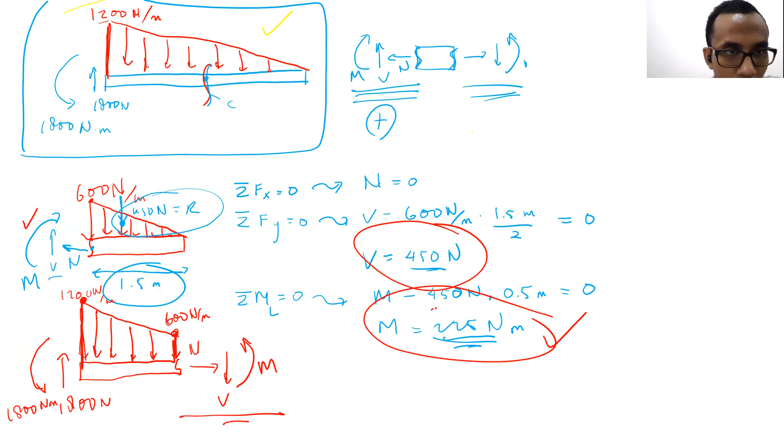Isn't both of the moment clockwise? Both of the moment clockwise? No. The top one, this particular free body diagram, actually showing the right side of the cut, right? The moment is clockwise, yes, there. But for this particular free body diagram, the moment here is counterclockwise.

Wait, no, sir. I mean, for the calculation for the right side, isn't it supposed to be M plus 450 times 0.5? Which one? M plus 450. Ah, you mean this one? Oh, yeah, correct. Yes, thank you, Jovan. You are correct. So this one is supposed to be M plus 450 Newton multiplied by 0.5 meters equal to 0. So this one is supposed to be plus. That's why the result is supposed to be minus. You mean that way, right? Yes.

So the actual moment here is supposed to be counterclockwise then, 225 Newton meters counterclockwise. Yes, but this is for the first free body diagram, okay? Not the second free body diagram. Okay, thank you, Jovan.

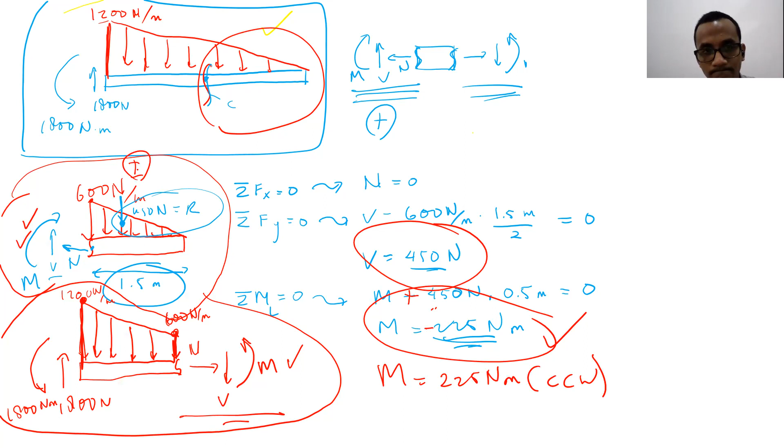Yeah. So basically, the value of the moment is negative, right? So it's supposed to be the opposite of what we draw there. Instead of clockwise, it's supposed to be counterclockwise. So this is a negative value of moment. But actually the easiest way is just put it as negative. The meaning is counterclockwise using the first free body diagram.

Okay. Why we supposed to use the negative value? Because if we use the second free body diagram, this free body diagram, the value of the moment will still be negative. This one, negative 225 Newton meters. You get it? Yeah, I get it. So if we use the second free body diagram, the direction of the moment there is supposed to be clockwise. Clockwise, yeah. Plus clockwise 225 Newton meters.

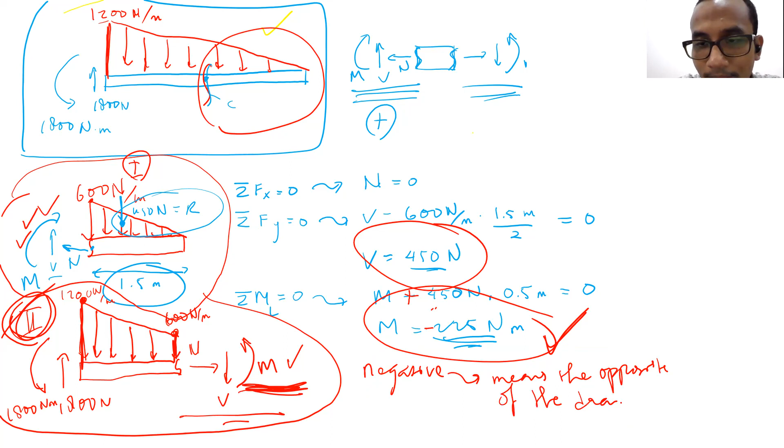But in order to prevent the confusion, instead of putting it like this, just put negative there. Negative means the opposite of what you draw. So we put negative, but we still put it as clockwise direction? No, just put it negative. Negative means it's the opposite of the drawing, like that. Okay. Thank you, sir.

But in reality, the moment there is supposed to be 225 Newton meters counterclockwise using the first free body diagram. Do you get it? Yes, I get it. But in the second free body diagram, in reality, it's supposed to be clockwise. Yes. Because it's supposed to be the opposite of the drawing. That's why the easiest way is just put negative there. Okay? Thank you, sir. Thank you, Jovan, for correcting me. I didn't realize that I made a mistake.